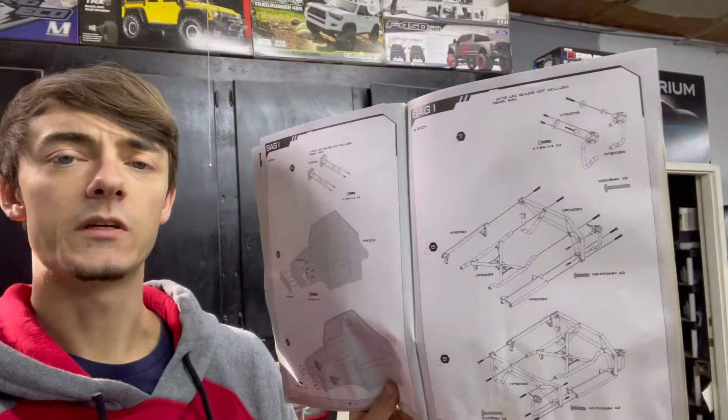We're gonna see, but right now the next step is to go ahead and paint our body. We got the body here. I don't really know what color yet, but I'll figure it out. Got to get this body painted, the two bed sides and the dash piece on the inside, because it really can't move forward until we do so. I mean technically we could, but if you look in the instruction manual, the next step is the body, and then we move on to the chassis pieces. So I'm just going to go ahead and paint the body and do a cool color. Not quite sure yet, but we're going to figure something out right now.

For our paint options, we have just a little bit of paint. I don't have too much, but I got a bunch of blue pearl, some candy apple red, some regular red pearl, silver pearl, regular white pearl, white. There's a bunch of black backers - I think there's a high gloss black and an ultimate backer back there as well, and some Tamiya black. So I don't have that much options, but we're gonna come up with something cool.

Not quite sure yet. I wanted to do white, maybe match the F450, but then again I don't, because it's white, and that's white, and the Raptor's white, and the other Jeep's white. Kind of want to do blue, kind of want to do red, but I'm not really a red guy, so I have no idea. There's so many options here. I really just don't know what to do. I mean, the blue is cool. We can maybe do blue. I don't know, red? I'll figure it out.

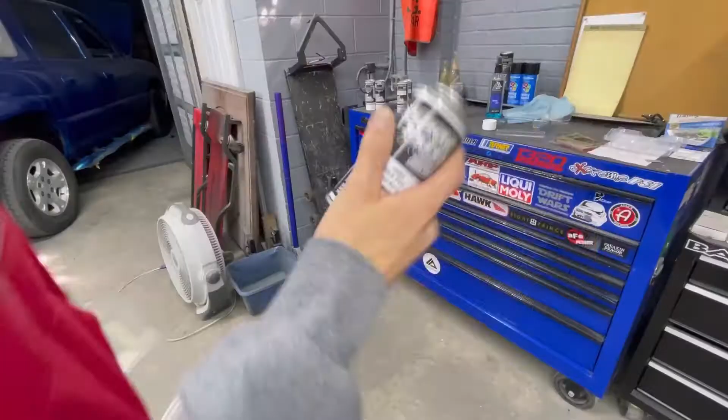First off, we got a little special sauce. We're about to spray on this bad boy.

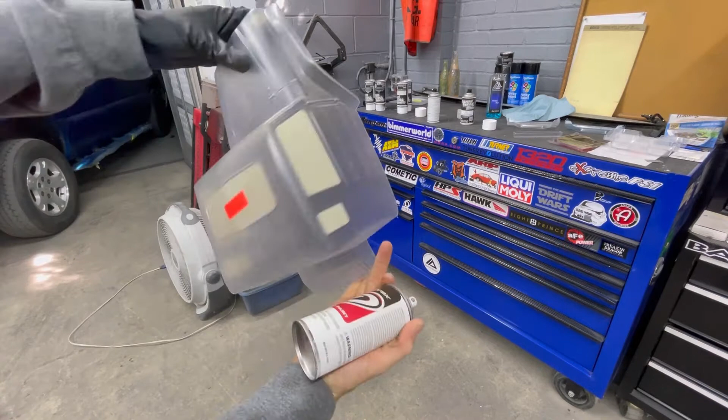Sure, we got some nice even coverage everywhere. We didn't go too hard on any spots. I think we'll be all right. This corner is a little lacking though.

I think we're ready to follow up with our main coat, and this blue pearl right here - or just candy, really, just translucent - it's gonna go over the top.

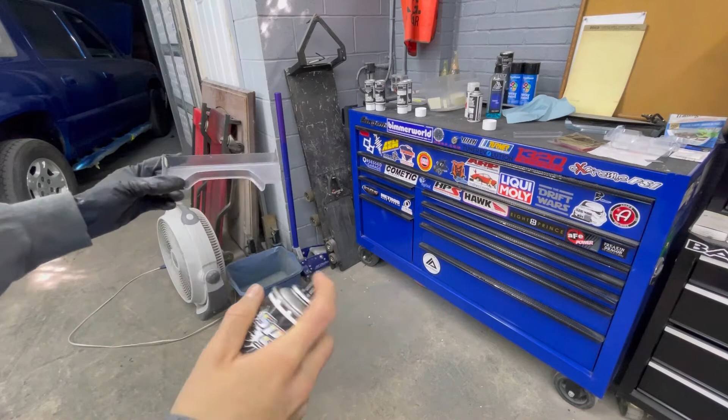Let's begin our first coat. These cans are really good, they got a nice spray pattern, really like them. Just a nice light first coat going over top, same with this one. I'll proceed to the body itself.

I think what I want to do is spice it up a little bit more. We're going to throw some additional blue pearl on top, just give it kind of a blue sparkle effect in a way. Once we have this first coat down, that way it doesn't cover all the way through, we're just going to go over top of this pretty aggressively, with this guy.

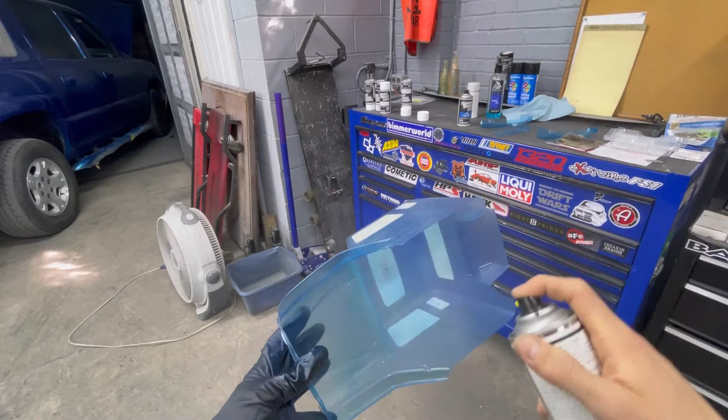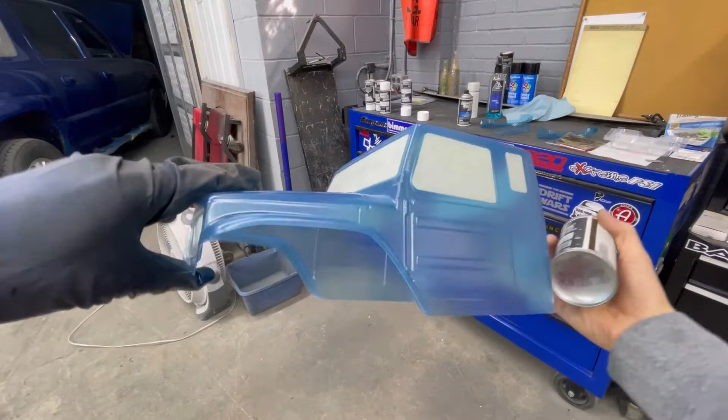Coming along pretty nice. Yeah, I think we did just the right amount.

Then the rest of it, just kind of make sure I get all my edges first and then fill in and make sure everything blends together. It's not that bad with normal colors, but with these pearls and the really translucent colors, you got to worry about your even coverage or else it won't match, and you'll just have some streaks and stuff, so you really don't want that.

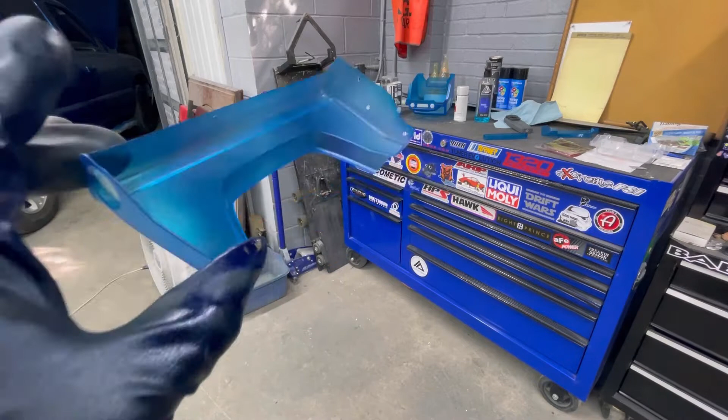I'm not sure how I'm going to back this yet. I don't know if I'm going to do black or silver. I'm probably not going to do white because it's going to make the blue really bright, and I kind of don't want that. So I'm just going to go ahead and finish this, and then I'll see you guys when it's done.

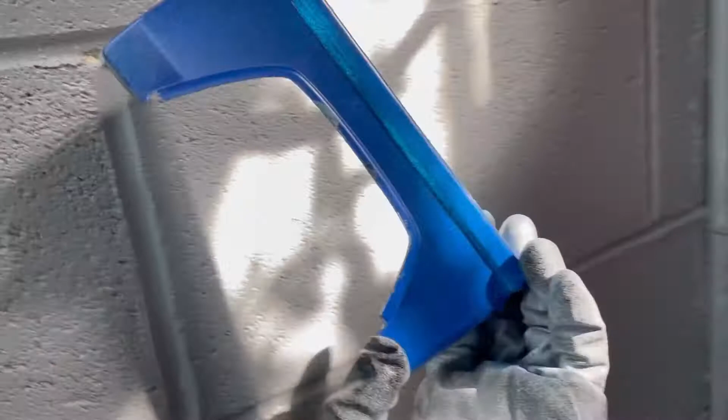Okay, so this stuff has turned into like a 7-stage pearl almost. I don't know if you guys can see - this doesn't do justice right now, it's still got the mask on top of it. But this stuff looks phenomenal, it's crazy pearly, it looks really good. I kind of got excited and I peeled a piece off the top so you guys can kind of get an idea of what we're working with.

If I can grab the body - just look at that, look at that. Oh my goodness.

Wow! That is crazy, dude.

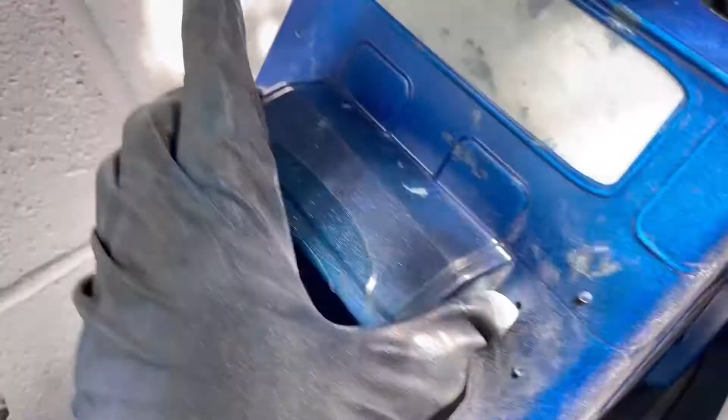Kind of did something else with this, and I realized I didn't really like it that much because the black speckled and came through, and I hated it. Luckily it's just a little toolbox piece, but everything else looks fine. It was quite a disaster to try to get this paint on there.

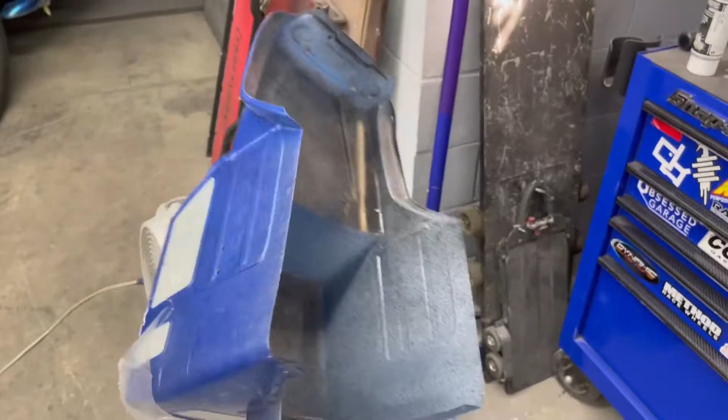Like I said, it's like 7 stages, just multiples. I really needed a silver. This blue shows you how translucent it is. It's really translucent, so I really needed like a blue backer, just a normal blue that wasn't translucent, or a silver or something.

The silver would have added more flake to it, and it kind of made it like a baby blue, washed it out, instead with the white. So I put white and black together, made a gray. I think it turned out pretty freaking good.

I'm really excited to see what it looks like once it's all dry. Come back, get all this mounted up once it's dry, and kind of just go from there. So we're gonna go eat lunch, and we'll come back.

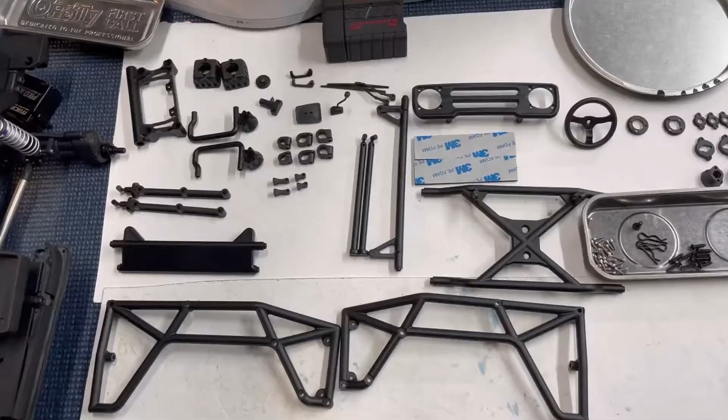All right, bag I is all laid out. You have a ton of little pieces everywhere. There's a ton of these little screws. Got some cool stuff over here. Looks like a grill and a steering wheel, some windshield wipers, door handles. Just some awesome parts right here.

Let's go ahead and get these on the car. I'd highly recommend taking your time with this, taking that little X-Acto blade and going over everything very thoroughly, making sure you don't cut any of the pieces. These pieces are very tiny, very fragile, and you can easily screw one up. It's not that hard to do. I didn't do it, thankfully, but I could see it happening. So just use caution, be careful, have patience, and take your time cutting all these off the little templates.

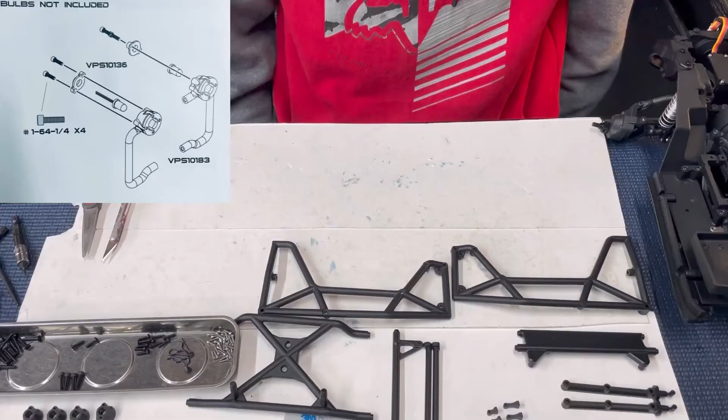Right now, we're going to start with bag I. This is going to be assembling the back bedsides and chassis pieces. So let's go ahead and dive into this now.

First off, what it wants us to do is grab our 2 light buckets for the rear of the truck, and it wants us to put the little pieces in. They're going to hold light bulbs if we're putting bulbs in there. I'm not putting any in right now because I don't have any. You're going to take one of these, and it's going to be a bulb holder. Once the bulb's through there, you take this, put it over the back side, and you're going to put these 2 little screws in that'll hold the bulb.

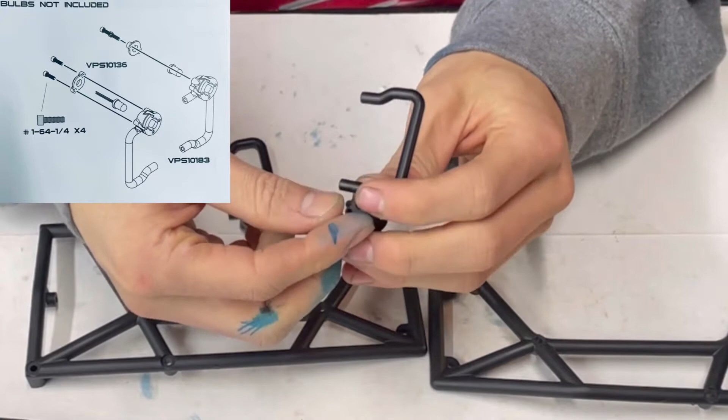I'm just going to go ahead and install these with the 1/64 1/4" screws, so they don't fall out and I have them. You take your smallest screw right here, it's going to be a 1.5. Just very gentle with these. Probably shouldn't be using a drill, but it's so much faster. That's it, because you're not really trying to hold anything but a bulb. Once you have these 2 guys assembled, they'll look just like this - 2 little screws and a light bulb in here if you chose to use a light bulb.

Now it wants us to grab this guy right here, and this is going to connect our 2 bedsides together. So what we're going to do here is connect our first bedside, which will be the passenger side. When you go to put this together, you're going to notice this is flat on one end and rounded on the other. You're going to line that up with the flat piece and the rounded end on this, where the 2 flat pieces are together and the 2 round pieces are together.

Then we're going to take and use one of our screws, the M3 by 18, you're going to need 5 of those. You'll start that through there, and that's a 2mm. You'll start that in there until it gets lined up. Then you probably want to follow back behind and make sure you snug that if you're using a drill. There you go, this is all lined up, and now you can proceed to do the rest of it.

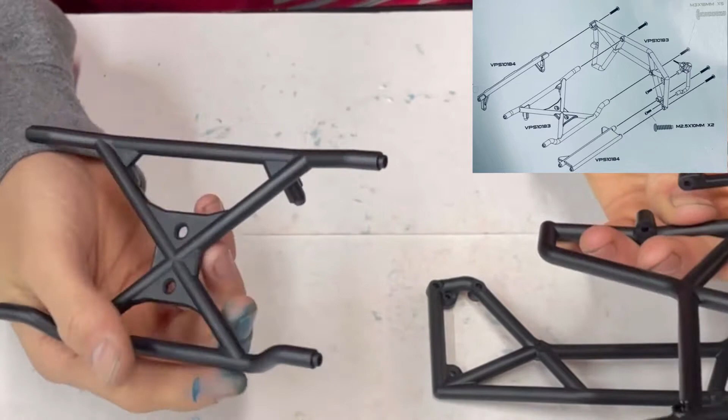So it wants us to take this little X brace right here, it's going to be like a spare tire holder, I'm assuming. You're going to go ahead and connect this - this top bar is going to connect here, and the bottom one's going to connect right there. You're going to put 2 more of those screws you just put into the first part into these. After you get these 2 connected and this piece is on there very snug, you're going to proceed to take this flat piece.

And it looks like it wants this piece pointed down, so the flat piece should go up towards the sky or the top of the truck. You're going to do the same thing at these 2 holes, lining them up into there, and putting 2 more screws through it. Once you have those 2 through, now it wants us to grab one of our light buckets, whichever one is appropriate for that side.

So you have the outside that you didn't put those 2 in, pointing towards the outside. You're just going to take this and set it on the side, lined up with these 2, just like that. I want you to use 2 of the M2.5 by 10s, so 2 of these little small guys.

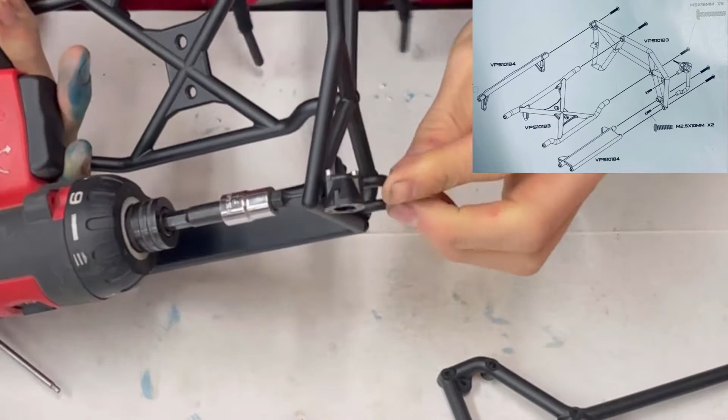I'm going to start this through the one side, just like this, then line that up and run this through and tighten it up. Now of all of these, just be very careful if you're using a drill. Watch right here when the plastic comes to meet together and then immediately stop it. These will strip out really easily.

Now once the side is together, you have 1 screw in the top for this piece, 2 screws in the top for the center brace, and 2 screws here for the light bracket, with this pointing towards the outside. Then you have the slat piece pointing upward, and you have this bolted in with 2 of those M3x15s as well. You're going to repeat the exact same process on the other side and get it all looking the same.

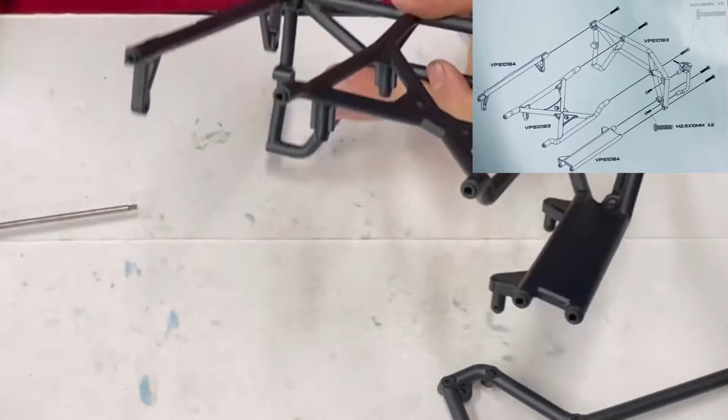Alright, now that you've completed this, every side should look identical, exactly the same. Something to note here is I would go ahead and bolt these 2 on first. I didn't notice that till I did it, but if you notice, once you go ahead and bolt this side up, if you don't have this guy on here, your drill isn't really going to fit.

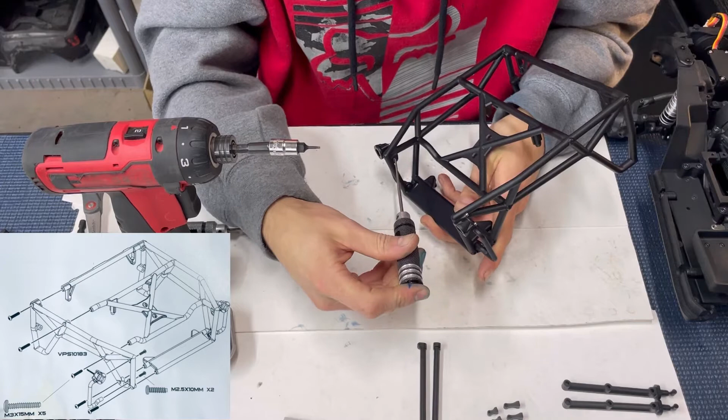If you have a regular nut driver, it'll definitely fit through one of these holes somehow. You could either do it like this at a slight angle, or go through the bottom, just like that. But I'd go ahead and assemble these to the side panels before you assemble all of this stuff to the centerpiece.

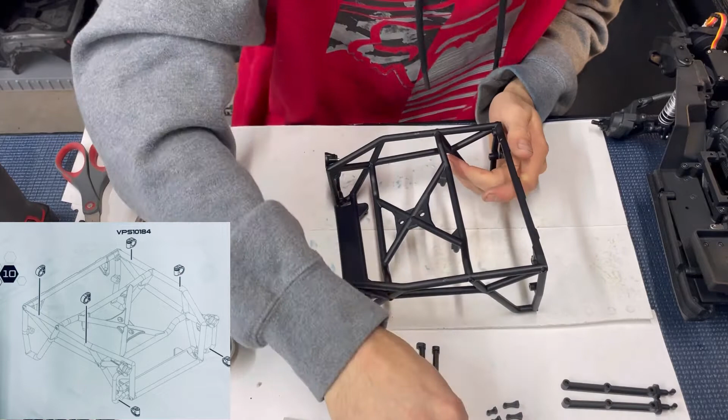We have our chassis exoskeleton, whatever you'd like to call it. What it's wanting us to do is connect these guys right here, so we can mount the body panels to these. These are just going to open like this and slide over top of these rails. You have a few different ones. It looks like they want the 2 smallest ones towards the back right here, and all the bigger ones pointing up, so this piece pointing toward the ground almost.

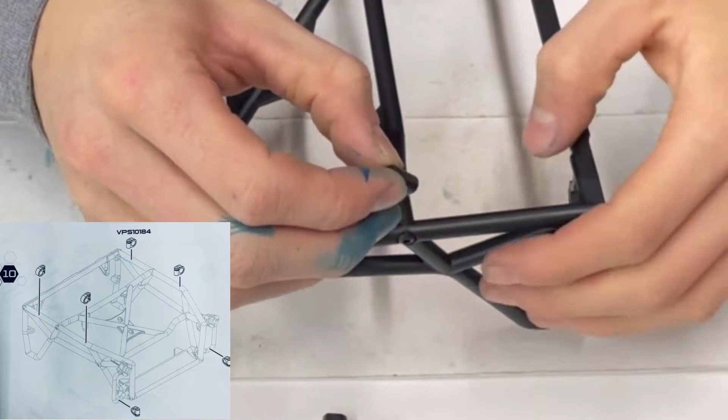So for instance, this one, you're going to take, split open, slide over top of, and leave just like that, with the skinny side up. Tricky to get, they're quite tiny, but just like that, they'll snap on, and now you can go ahead and proceed to put your bedsides on.

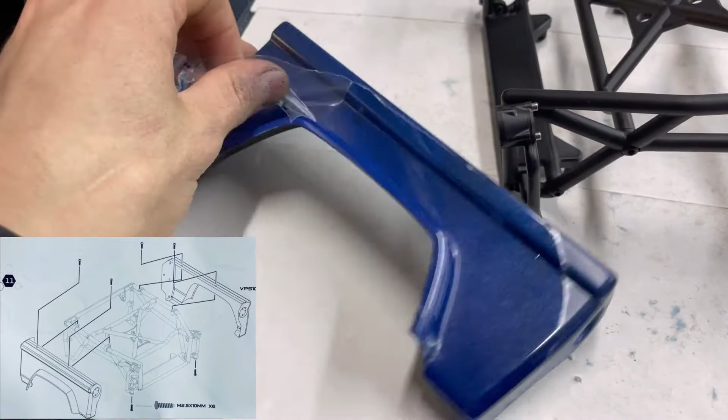Alright, so for this step, you got your 2 bedsides. I went ahead and peeled this off, just look at the paint, it looks phenomenal, I'm really happy with it. I wish I wouldn't have peeled the mask off. I would recommend just leaving the mask on as I did on this side.

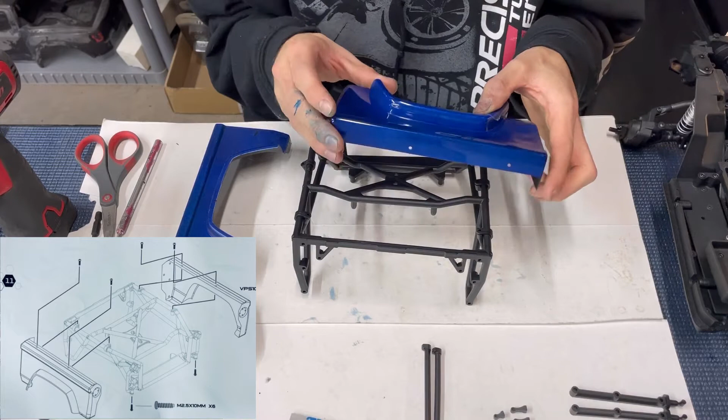I just peeled off what I had to so I can get to these bolts. That way you don't scratch this or anything trying to assemble it. It's completely up to you. I'm just really kind of weird in particular, even though I peeled this one all off. Whatever, I wasn't thinking. But nonetheless, we're going to go ahead and take this guy, since I peeled all this off so I can get it on here.

You're going to want these guys pointing straight up like we were talking about, with the thick part pointing down. Make sure you untape your little tail light piece. But first off, we're going to make sure all these are straight. We're going to slide this piece directly over top, just like this. You can really only go one way, so you can't really mess it up. And then you go ahead and line these up to those holes.

And what they want you to do is take some of your M2.5x10s, these little guys. They want you to put 2 right here through the top, just like this once you line those up, and then 1 through the bottom. That'll be your last 3 of these. It's a 1.5.

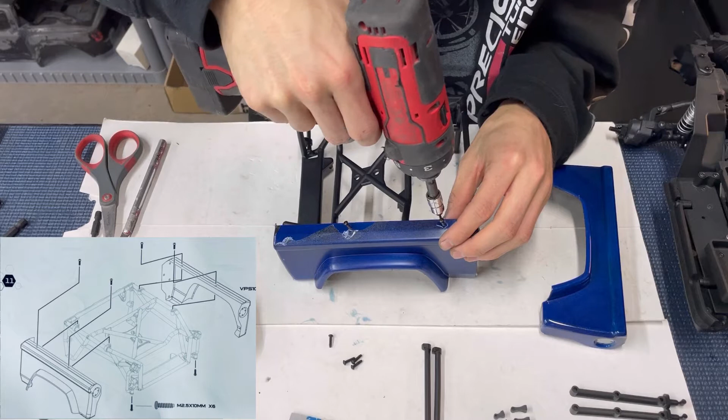Slide this guy until he lines up with the hole. Once you get him to line up with the hole, hold them together. Take one of these screws, set it right in the top. You can go ahead and twist it a little bit, get it started, and then you're good to go ahead and tighten it down.

Doesn't have to be stupid tight, it can be just barely tight. Also, to take note, wherever you tighten it, like this thing, these turn down like this, it's going to pull the bedside in because it's really flimsy. So make sure you keep them straight, so everything is laying across perfectly straight across the top.

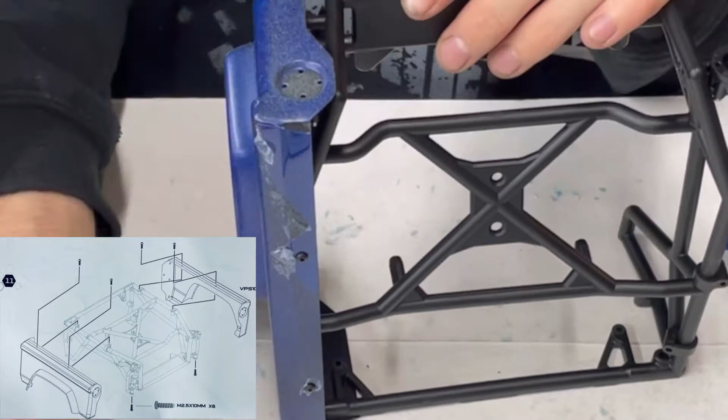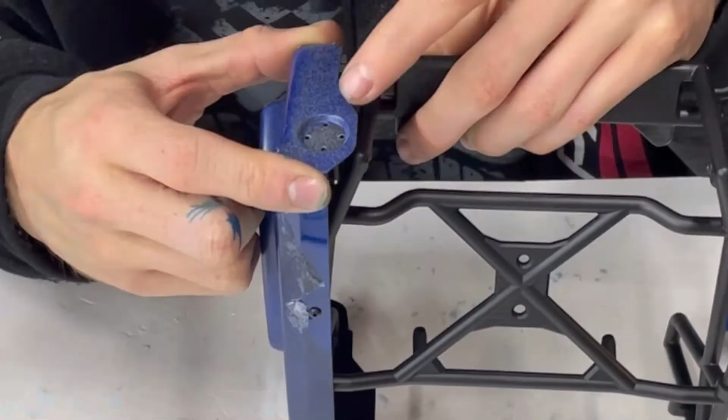Go ahead and take one of these, bolt it right here on the back. I'd like you to take these little silver screws again, you're going to need 4 of them, followed by your little tail light bucket. Go ahead and make sure this is lined up on the inside, and then take this guy and set him right there.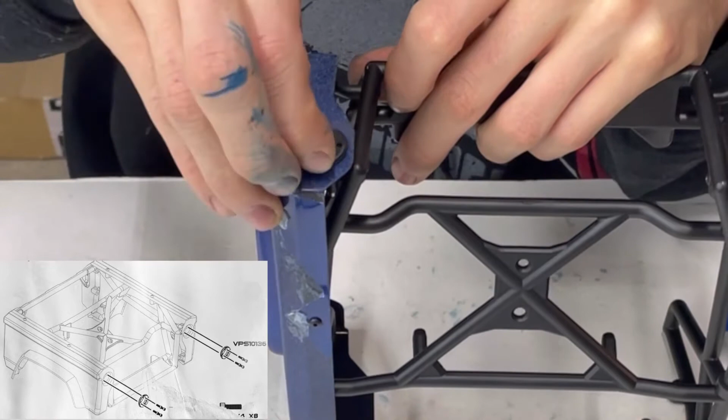Take one of these screws, put it through the top, make sure you line it up, and then proceed to tighten it up. Once you get all 4 screws in, just snug, like I said. They don't have to be really tight because you're just going into plastic and you're not really holding anything, just holding this little plastic piece in. You just don't want them to fall out.

Got all your mask peeled off, and you should be all good to go, and then you can proceed to follow the exact same steps on this other side.

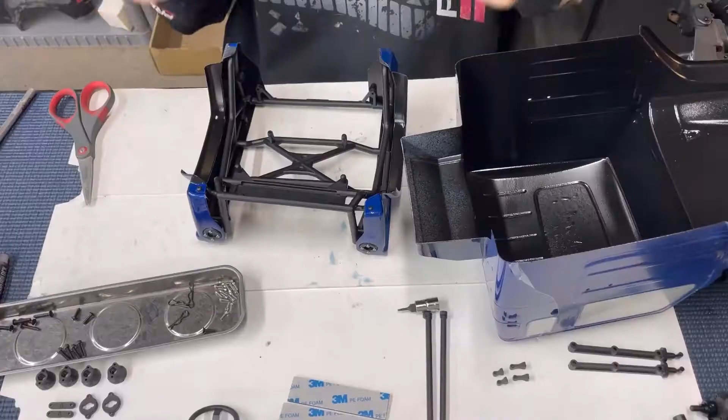All right, so next, moving on to bag 34, what it would like us to do is assemble our bed to our cab. Once you have all this done, like I said, you just repeat the same steps on each side to get it all put together.

Your final product is going to look something like this, all your screws are in, bottom as well. This hole, I believe, wasn't cut completely right because it made it a little sideways. I mean, that's fine.

So next what we're doing is taking our cab, setting it right here, and you have 1, 2, 3, 4 screws in the back right here. It wants us to go ahead and utilize 3, leaving this inside open. For those 3, it wants us to use these M3x15s, the aggressive screw. We're going to go ahead and set this up just like this.

Make sure you have all your film peeled off the truck. If you're like me and you kept it on, if you peeled it all off already, that's awesome, you don't have to worry about it.

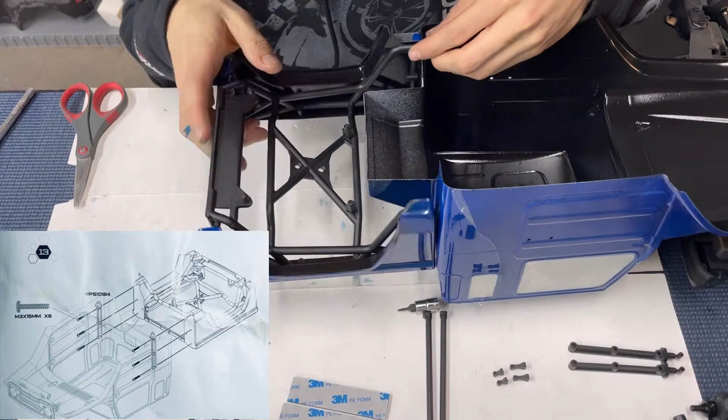Go ahead and set this in here, and you're going to have to line this guy up, through the cab, through the bedside, and then into your roll cage. Once you get that lined up, you just have to thread this in.

It's really a nightmare to line up, not the easiest at all. It took me a good couple minutes. Once you get it, you'll be fine. The first one's going to be the hardest, of course, and then you can go ahead and proceed to connect all the other ones.

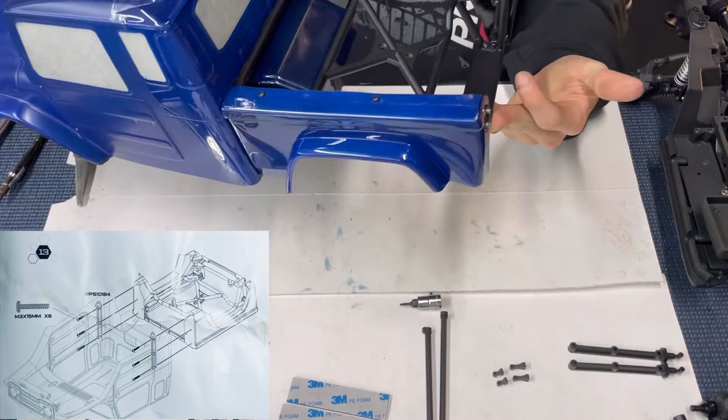It's just going to be 3 here and 3 here, just as the manual says, these M3x15s. Okay, once you get the bed mounted to the truck, you'll have the fully assembled cab and bed piece. You're gonna again put these M3x15s through the back side of here, and everything should go smoothly.

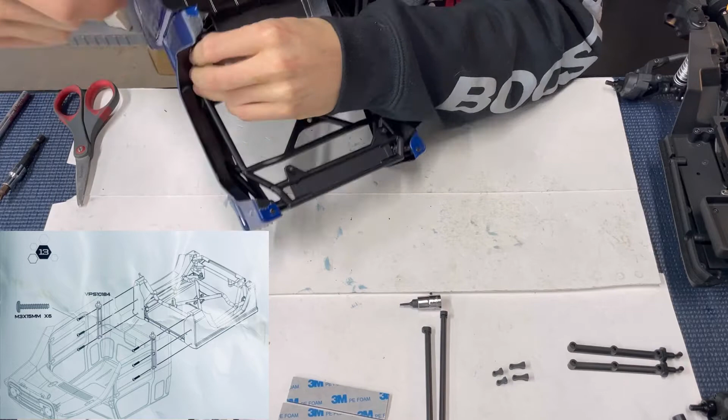It's really difficult to get it started, as you guys saw. Once you get one started, the rest just fall into place. Just make sure when you're grabbing this, you don't grab the whole piece, grab the bed side, or the chassis brace and the bed itself. That way you can maneuver it, and you're not just pulling everything back and forth.

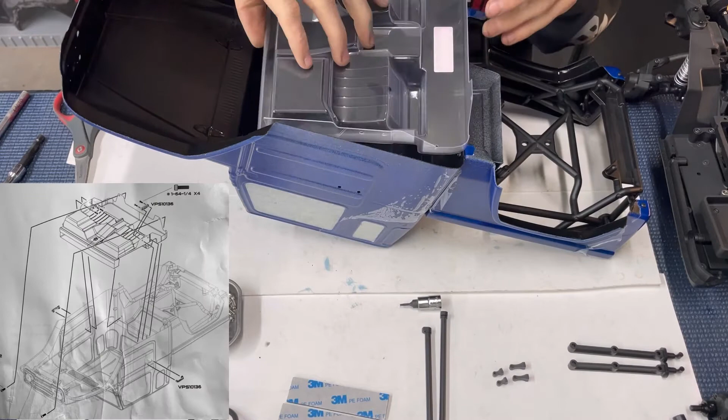Now moving on to our next step, it would like us to insert the cab interior into it, just like this. Into here, and then that's where you didn't put these 2 screws in right here. You're gonna go ahead and put those in now, followed by these 2, which I believe would be some door handles of some such to help hold this in.

I'm not doing any of that right now. I'm kind of skipping this because, as you see, I haven't painted this. I really want to do some brown seats, and I don't have brown paint right now, so I'm waiting on that to come in, and then I'll go ahead and finish this up. It's really not that big a deal. Everything else can be finished.

But I'll go ahead and walk through what you'll be doing to assemble this in the truck if you guys are curious. The inside right here, we have these 2 holes, and it's going to come together. You're going to take one of your door handles. It's little, just exactly what it is, a door handle piece.

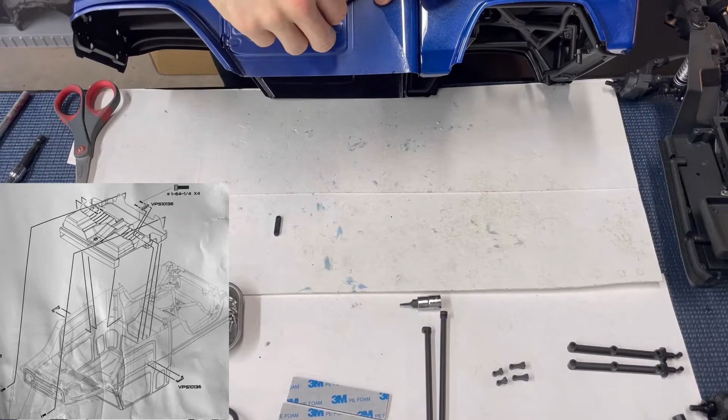Two of these guys have the little Vanquish logo on the back. With this pointing up, grab the door handle that goes to the side with the lock pointing down, and insert that right into here from the outside of the body. Hold that with your thumb.

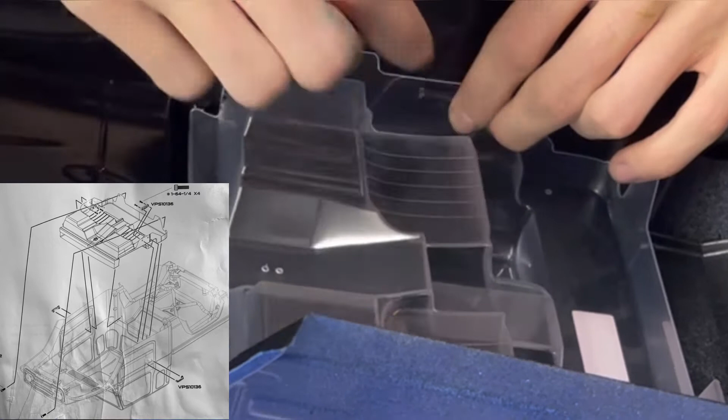Once you're holding that, make sure you have this chassis interior lined up. Once you have that lined up, you see how it comes through here, and it's in the body on the outside, and inside this, you're going to take this little Vanquish piece right here, up and down, and place it directly over top of both these. It should all fit together really nice.

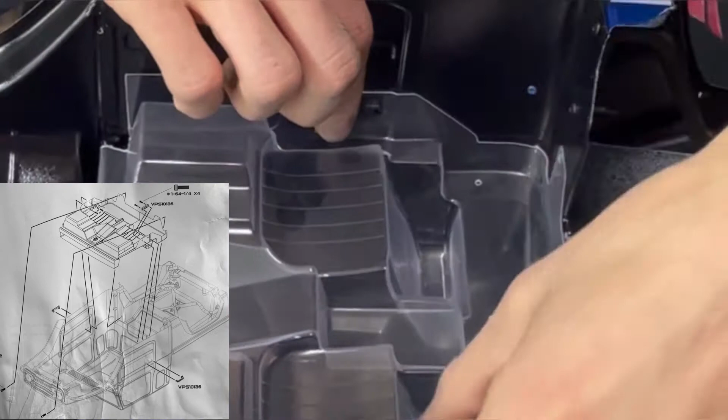This is where you're going to come in with these tiny little screws, the little silver ones, the 1.5 mil, they're 1/4, you need 4 of those. You're going to put 1 on each end of this door handle, and that's going to help hold this all together right there. You do that on this side and the passenger side, followed by putting those 2 pieces in the end, the M3x10s. Okay, now for our body up here at the front.

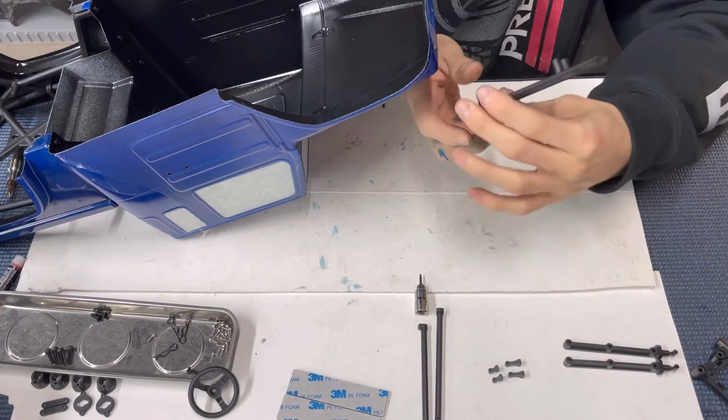Once you've painted this, make sure you take these off the headlight housings right here, so you don't have to worry about that later. Proceed to install your grille, followed by your light buckets. It's pretty self-explanatory here, it's not that hard. We're just going to go ahead and dig through it.

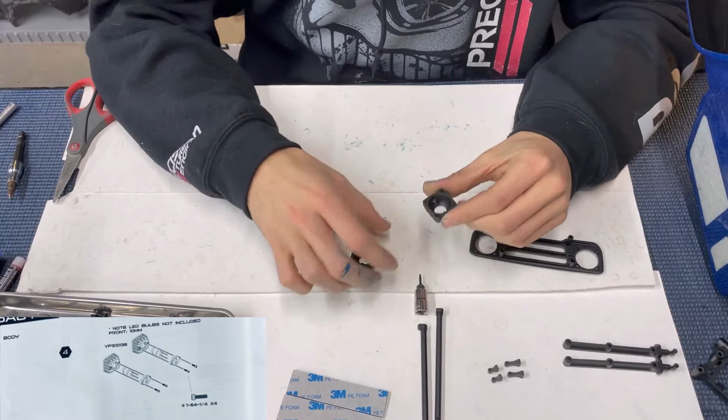For your light buckets, if you're using these guys, you're going to want to put your LED through the back side. You'll need 2 10mm LEDs for the front if you choose to run those. Once your LED is through, you're going to proceed to connect this piece to the back just like we did on the rear of the truck.

This is going to hold your light in there, and you're going to proceed to connect that with 2 of these little 1/4 inch screws, screwed right through the back side just like this, with your LED in there holding everything together. Once you have both those assembled, your LED will be in here if you're using those, and then these will be on the back side of your wires pointing out, holding everything together.

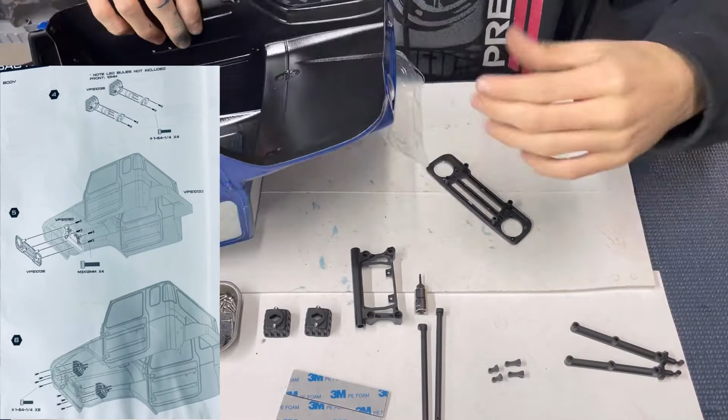Then you're going to go ahead and set these to the side. What you want to do now is grab your front grille piece, followed by this little inner grille brace. Make sure your film is pulled out of the way off your body, and then take the front of your grille right here and connect it to this. It slides in just like that.

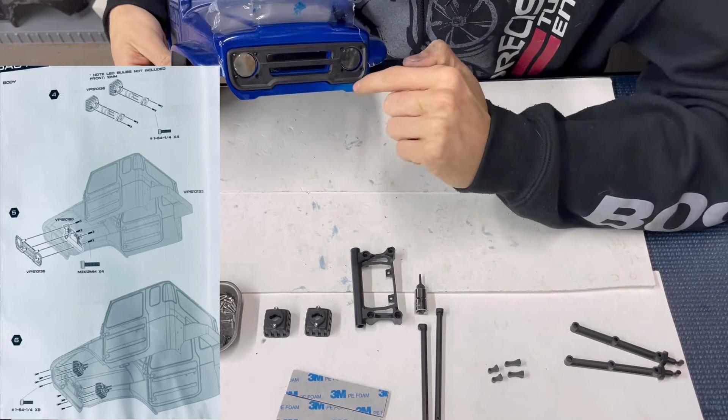The little curved angled piece is going to go down just to form with the body, and the flat piece is going to go towards the top. So now flip this over, and you have this guy right here - the hollow bar is going to go pointing upwards away from the hood. When you go and push this on, it should all slide in perfectly together.

You're going to take the 4 M3x12 screws they gave you, and go right through the center of here, and this will hold the grille to this bar, and this is what's going to hold the body to the front of the chassis. Once you have these 4 screws in, your grille is completed on the front as far as being installed and solid to the truck. Now you can proceed to put your light buckets in - these are going to go in just like this.

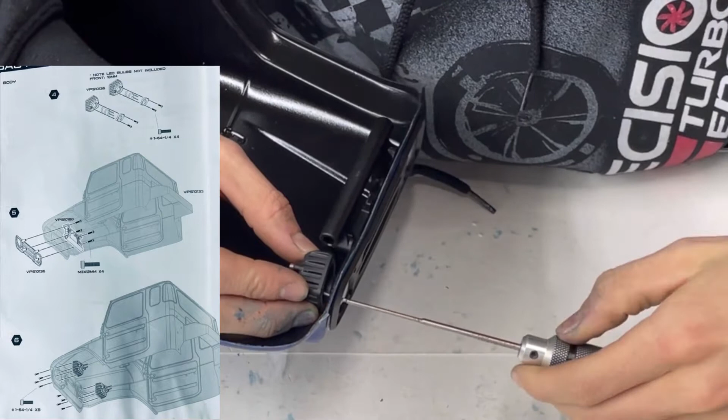Going to put a screw through, put your wrench on the end of it, and start one of these just to get it to hold, because you got 4 to screw in. Once you get that done, the rest will be easy and you can knock those out. You're gonna have 1, 2, 3, 4, just like that, and the light bucket's gonna be installed. I'm gonna go ahead and do that and I'll get right back to you.

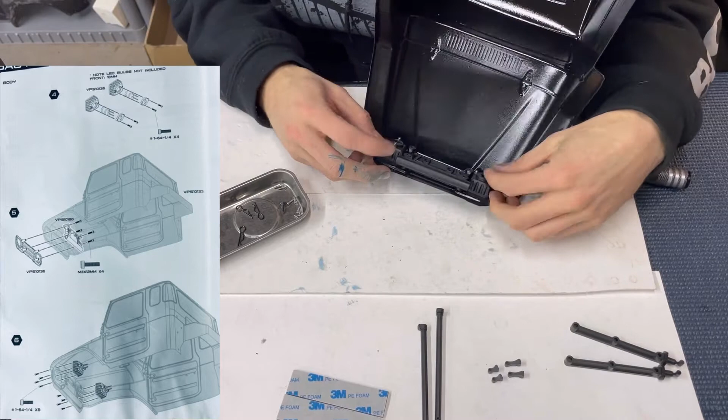All right, once you have your light buckets installed, they should look just like this. You should have all these 4 screws in here lined up and everything should be assembled on the front grille of the truck, and you can proceed on to the next step.

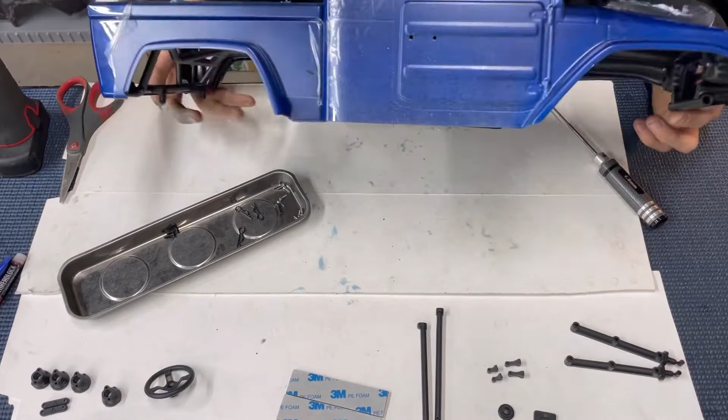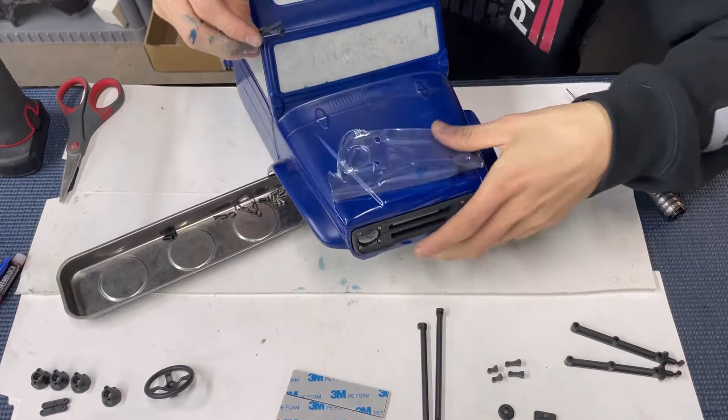Now your body assembly is complete. You can go ahead and remove all your film if you like to now, remove all your window masking and all that good stuff, so your pretty interior if you put that in there. You'd also begin to put these little scale accessories on, such as these windshield wipers. There's go right here some sort of way, however you'd like to place those. You could put them like that, it look like they're moving, or just whatever you'd like to do.

They don't provide holes for those. All you have to do is just take a small drill bit and drill 2 holes here. Then take one of these little tiny screws on the back side and screw it straight through there, and you'll be perfectly fine with that. Whatever you'd like to do there.

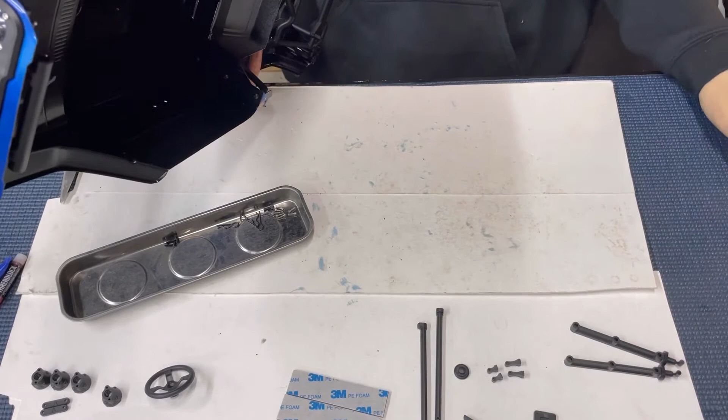You also have a little shifter to put into the interior if you'd like. Looks like you got a little fuel door. You just drill a little small hole here as well. Put this right there, and then go ahead and put one of these screws through the back side to hold it. And that's pretty much going to do it. Now we can go ahead and move on to our wheel assembly, and then we can move on to driving the truck and getting this thing on some trails.

All right, in our next bag, bag J, we have a beautiful set of tires and wheels here. They look awesome, very aggressive, really cool. They got the Vanquish stuff on them. The wheels seem to be licensed by KMC Wheels, the XD series. These seem to be really cool. They are plastic, but not to worry there. They seem very good quality. We'll go ahead and grab one out.

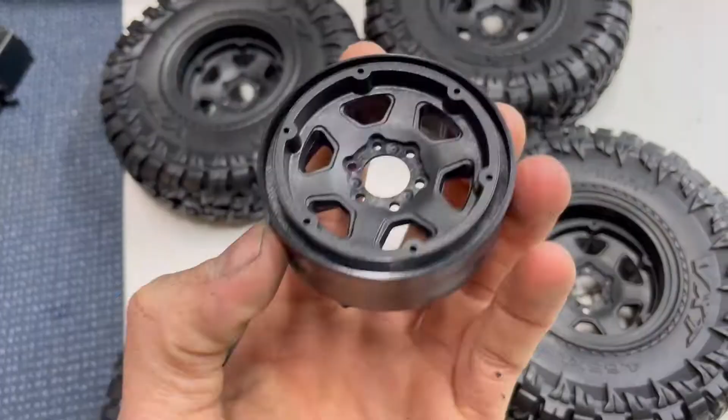So the wheels are definitely plastic. They're like a composite type, but not to worry there. They are very sturdy, very good. They definitely are not heavy as metal wheels will provide you. But on that note, they do provide you with aluminum rings. The rings are also not that heavy. Together as a set, they're heavy, but individually they are not. So metal wheels probably a good upgrade if you want to add some weight down low. Even though they did put the brass inserts in here, you're still going to want some metal wheels later on, but it's really cool nonetheless.

They give some licensed wheels, really cool looking tires. See how these perform on the trail. I'll go ahead and put these on the truck for the first couple runs, and then we'll probably upgrade to my favorite BFG KM3s, and probably just some method wheels, but these are really cool nonetheless. Great for an RTR, really good. I'm happy they came with metal bead locks. They're licensed. It's just really cool to see all that stuff, so I'm excited to get these on the truck and see. They're definitely not going to be bad at all.

All right, let's go ahead and grab one of these and throw it together for you guys. If you've never assembled wheels before, it's not that bad. You guys will knock it out of the park if you already got the truck done by now. What you're going to notice is you're going to have your wheel right here.

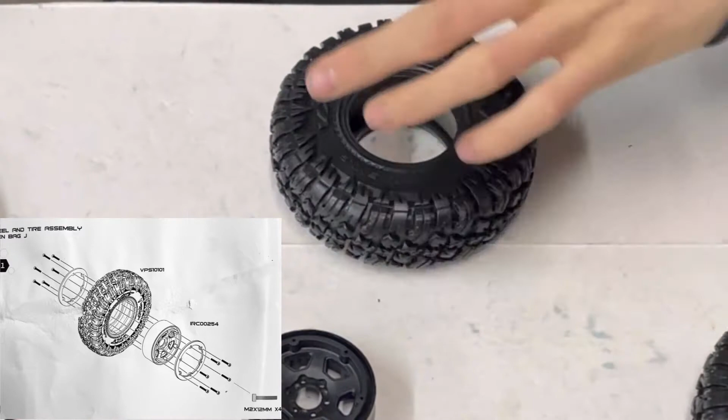In this case, it's all one piece. Normally on some other wheels, you're going to have a metal ring on the outside, which would be this guy, and then the inside's going to be a separate piece. So it's really like a 3-piece wheel, but these seem to only be 2-piece, not like a traditional wheel. These are chases I got to assemble for him. But yeah, normally you'll have that one ring on the outside, the center piece, and then the outside bead ring. These right here are a little simpler though, not to worry. So you're just going to grab your wheel and tire. Luckily, it's already came in the wheel.

If it didn't though, you just put this straight in the wheel like that. What you're going to do first is start with the back. Notice how the wheel has a groove cut in it right here, and then see how the tire is made, where it also has a groove cut into it and designed in its pattern. You're going to want to stick that groove in the tire into the groove in the wheel, just like this.

Go around there until it's nice and smooth, just like that, and you can tell you're in that groove really well. Hold some pressure from the back side. You're going to take this ring right here for the bead lock. Go ahead and line that up perfectly, just like that.

What we're going to do is take our M2 by 12 screws. We're going to put this in straight there into this guy. Go ahead and get it started. I like to go directly across from each other - it just helps line everything up and make sure your tire stays in that bead.

If it does pop out at this stage, no worry, you still have the opportunity to put it back in. So right here you can see my tire has popped out of my wheel. Not to worry, just work my fingernails around inside right here and get it back in that groove.

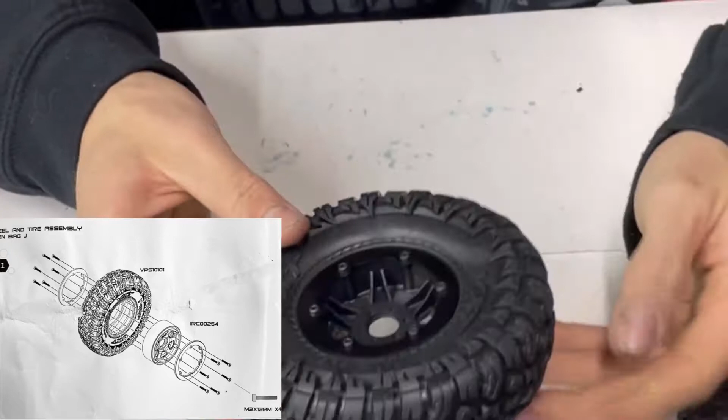Now looking right here, they give you 2 different offsets for your wheels. I'm not sure which one I'm going to run or which one to recommend for you guys to run. This one's definitely going to be a farther offset from the chassis, as opposed to this one which is going to be farther inset towards the chassis. So you're going to have a wider stance with this one, making the truck probably more stable, versus with this guy, you're not going to have as much track width, so it could flip over easier. It's completely up to you guys what you want to run.

You could run 2 of these wide ones on the front, 2 wide ones on the back, skinny ones all around, or wide ones all around. It's completely up to you guys and your preference on that.

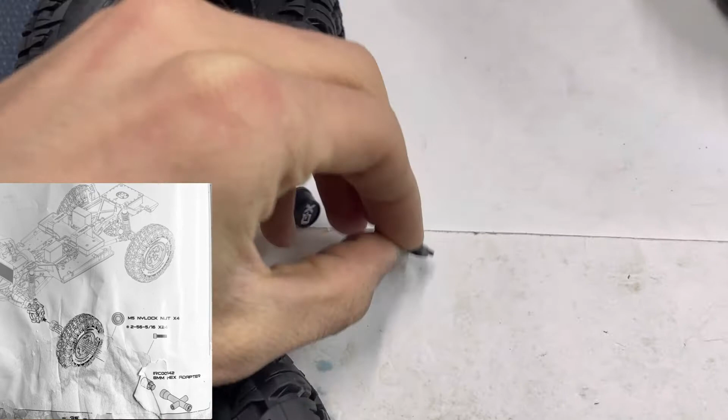So what you're going to do is take this guy from the back side of this flat piece, and this little ring in the center is going to center it. You're going to push that in, come to this side, line the holes up right there. Something to take note of: this little guy has an indent in the back, and this little guy has a lip around him. He is going to go inside of this just like that, then push into the wheel just like this, and you're going to put those screws into there.

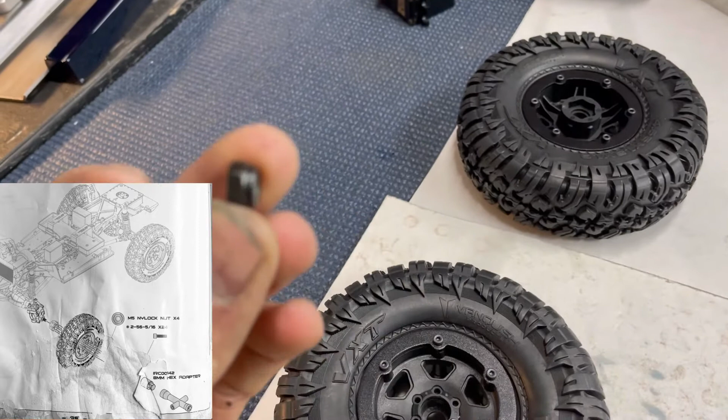6 screws go into that, but here's the thing - this is how you hold the wheel to the truck with this guy. Put him up there, take one of these nuts, and go through there with one of these. That's all fine and good, but the back piece that goes to the wheel that holds everything together screws to this piece. So you're going to have to put the hub on the truck, tighten the hub down, then take the wheel and tire and put those 6 little screws in it, if you want to run the center cap. If you don't want to run this cool little XD cap, you don't have to do that.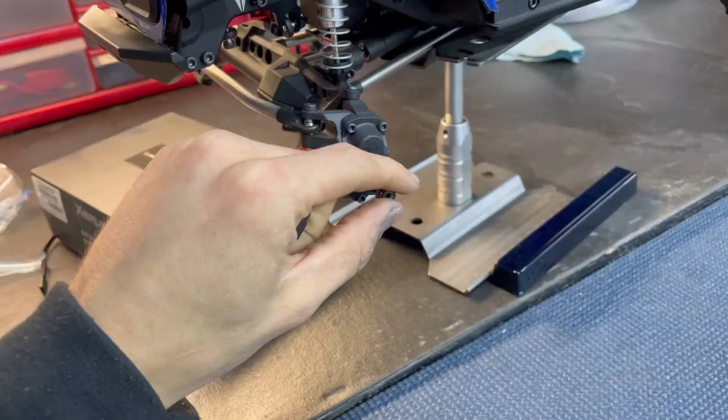Let me show you guys what I'm talking about here. So right here we have one that I accidentally already put that thing on, not knowing this. So this guy is going to go on here just like that. Make sure it's on the thing. You're going to put this nut on, and then for this guy, he has nowhere to go at all.

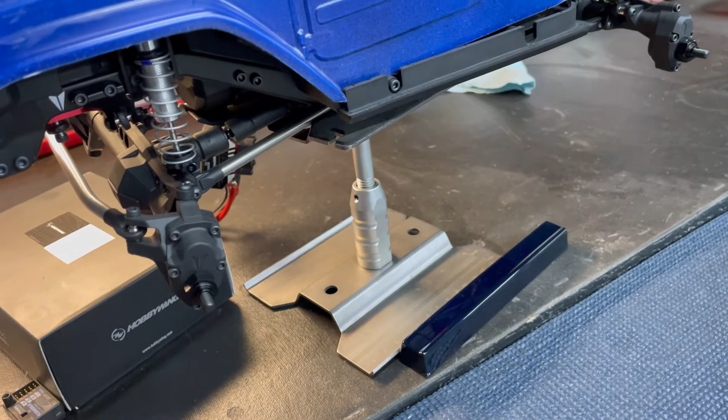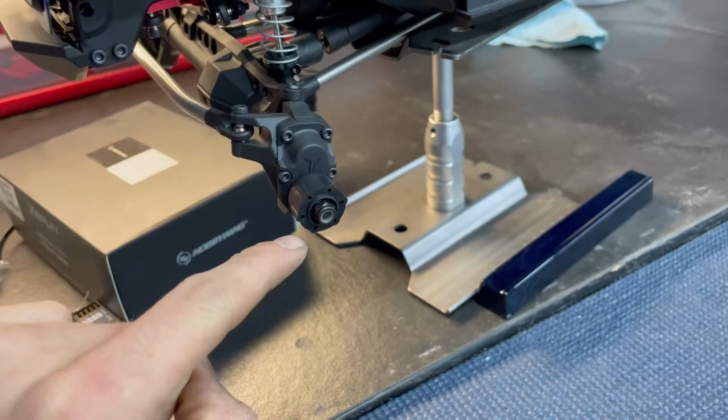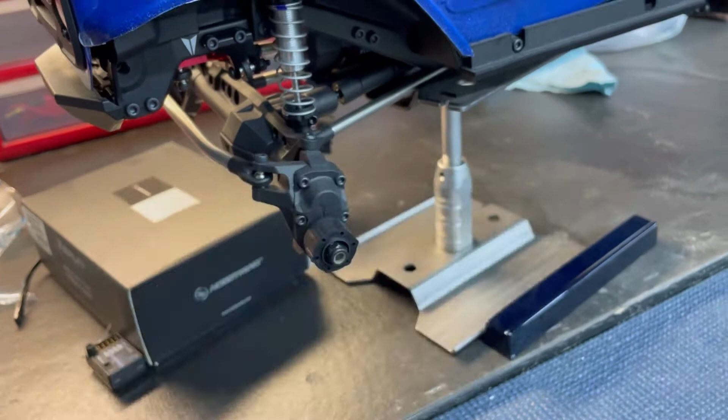So then what you're going to have to do to run these is take this, make sure your screw holes are pointing out to you, take this, put it on the hub, go ahead and put this nut on here that holds the wheel on, tighten that guy down, then take your tire and wheel, put over top of this, just like a real truck, put 6 little screws into that with your hub, and then that thing will go over.

Now, I admit, that is super cool. That is really cool. 6 lugs, just like a real truck and all that good stuff. Awesome, very scale, very cool. But one problem - do you know how tedious that's going to be to put wheels and tires on this thing or take them off every time?

I don't know about that, guys. I don't know how I feel about that. I mean, it's cool, don't get me wrong, it's awesome, this is just my opinion. I'm not right, I'm not wrong. This is Quaid's opinion, and that's all that it is. It's my opinion, very cool.

But now, granted, you won't have to take these wheels off all the time to do maintenance and all that stuff to the truck, but you do want to take them off regularly - I do, almost every time to clean the truck. So for me, these little guys feel like they're going to wear out very, very fast. Just my 2 cents, just my opinion on this, just voicing my opinion.

Don't know how I feel about that. I'm not going to run the center caps because of this now, because that's kind of silly. I do want to run them for the first time, but I don't because this is kind of silly. Feel like if they were going to do that, that's awesome - definitely a cool deal, but it should have been metal. Should have been metal, just my opinion.

So here we are, wheels are all assembled. As far as I'm going to go, I don't know what route I'm going to take. I'm not sure if for the first initial view I'm going to run these little guys and do that and put all of those 6 in each wheel, or if I'm just going to do the normal route like I was doing and just put that on there, bolting it to the truck like a normal RC.

So, did not like that. On to the next step. Okay, so we have this guy all assembled, all 6 lugs in there. Then we put our 5mm nut on the back. Everything is nice and tight, all this is in there good.

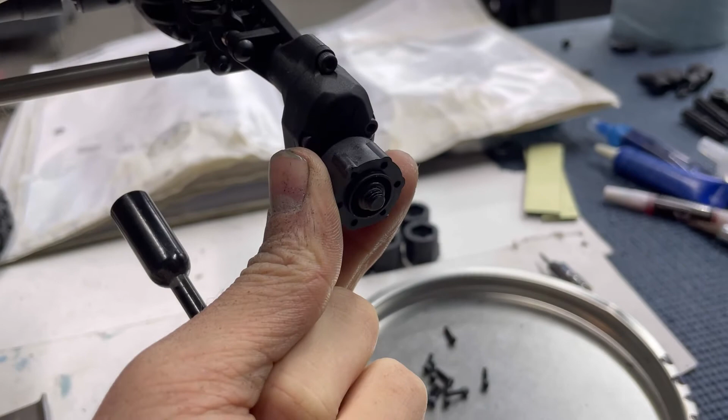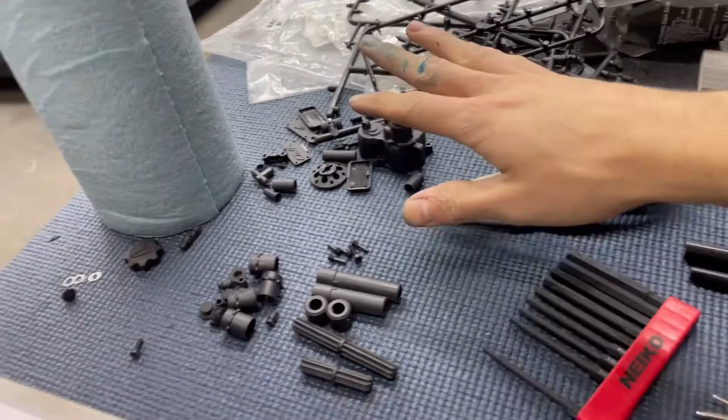Something I wanted to note on the back of here, if you look at your instruction manual, it says we need an 8mm adapter. I looked through everything in my bags. You can see it's kind of a mess, but I have all my little parts over here, all the spare parts I didn't use, and the baggies. Haven't thrown anything away, trash can's over there, everything has gone right here, just in case something happened. But I didn't get an 8mm adapter. Now, whether you're not supposed to get one or you are, I didn't get one.

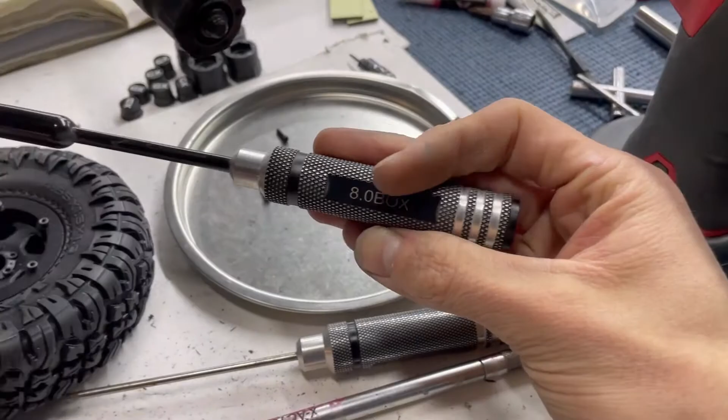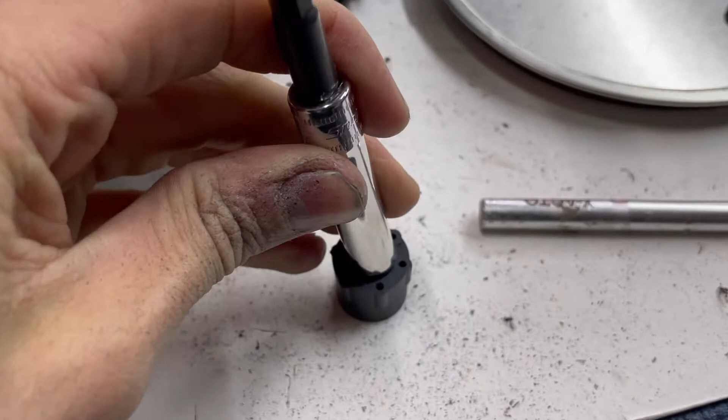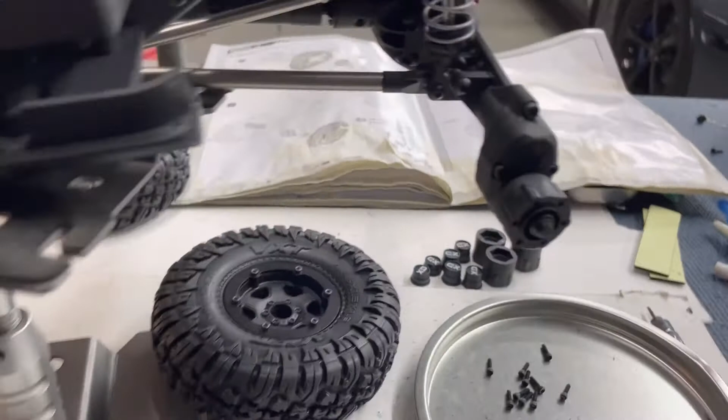I have an 8mm nut driver right here, followed by an 8mm snap-on socket, and I wanted to note that if you grab this piece right here, this doesn't fit inside of there. Neither does a normal 8mm thing, it just doesn't fit. So what that means is, if you guys are like, oh okay, we just need different tools, yeah that's fine, but I feel like that should have been bigger to have something fit in there, let alone a nut driver made for RC stuff. The reason being is I'm not even using the long ones, and I can't even get this thing to tighten down. So if I was using a long one, I don't know how I'd get all the way in the back of here to tighten this, because I can't even tighten these short ones.

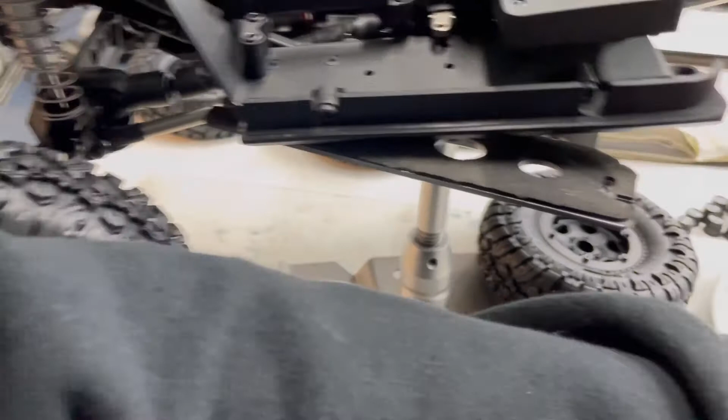Because this guy, as you see, stops right there, won't go up any farther. It's literally the same diameter. And this guy, you have to shove in there and it spreads this open, which is fine I guess, but you just have to hold this axle and push really hard while putting your elbow on this back tire so it doesn't spin. This is a disaster to do. I had to grab pliers, and it's just a disaster. So another little thing there, if you guys know a better way, please leave a comment below. But I'm also not liking how you got to tighten these things, let alone that I'm using the little 6 lug nuts, or I wasn't. You still have to tighten this guy regardless.

She's complete. She's so complete, so ready to go shred, ready to go rip through the trails. I admit, I'm sorry, I did take her out last night. It's a last minute thing. Finally got together with Chase and Lonnie. It's been like 6 or 7 months since we did that. So thankful to be able to get out there with them. It was awesome, it was so much fun. We're going back out again this weekend. I cannot wait. I'm going to put this girl through its paces, really get all of our testing done.

I'm going to have a review out for you guys very soon. I apologize for the wait, but I promise it's going to be worth it. I want to thoroughly test this thing, put it through every environment, every obstacle I can physically throw at it that I have to offer in my area. We're going to put it through it, let you guys know what I think about it, and go from there.

Right now, I want to go ahead and dive into my final thoughts of the build, what I thought about it, and then we'll go from there. As far as the assembly of everything, it went really smoothly. It went great. There were some hiccups here and there. I believe part of that was my fault for not being very thorough with reading my instruction manual, but also I believe the instruction manual could have been a little more thorough. It left some things out that I felt it needed to be more clear on. Nonetheless, we got the thing put together.